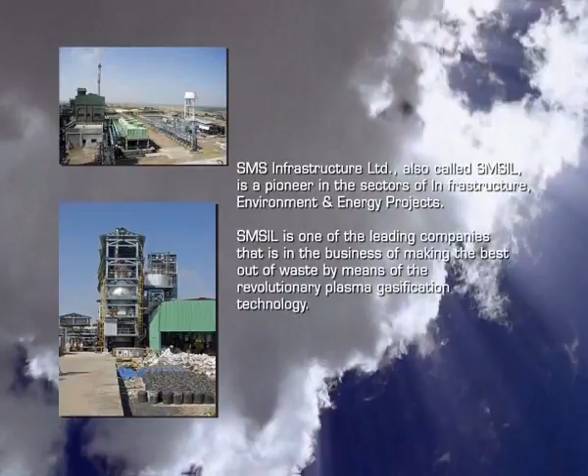SMS Infrastructure Limited, called SMSIL, is a pioneer in the sectors of infrastructure, environment and energy projects. SMSIL is one of the leading companies that is in the business of making the best out of waste by means of the revolutionary plasma gasification technology. It has its corporate office at Nagpur in India. Major advances in environmental projects have taken SMSIL to the international level.

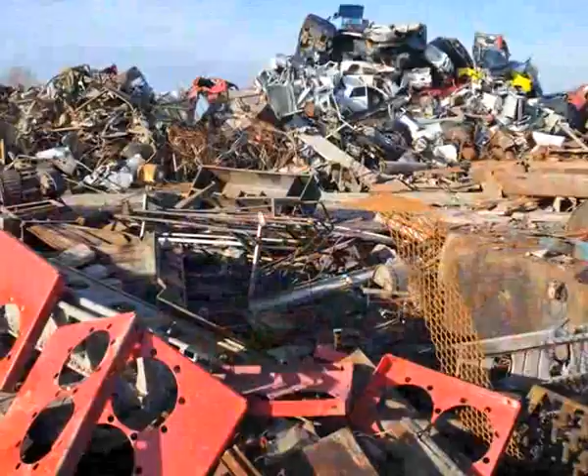SMS Envocare Limited is a group company of SMSIL and has successfully commissioned for the first time in the world the plasma gasification plant for the disposal of hazardous waste generated from more than 35 industrial sectors and several standalone units. The company specializes in creating solutions for scientific treatment and disposal of hazardous solid as well as liquid waste using environmentally sound methods.

What if we could harness the power of lightning to create energy? And what if in the process we could produce cleaner energy while reducing greenhouse gas emission and acid rain? What if we could produce power out of hazardous waste? A few years ago, these would have seemed mere questions, but today all this is possible thanks to plasma gasification. SMS Envocare Limited has demonstrated and transformed hazardous waste into energy using plasma gasification technology.

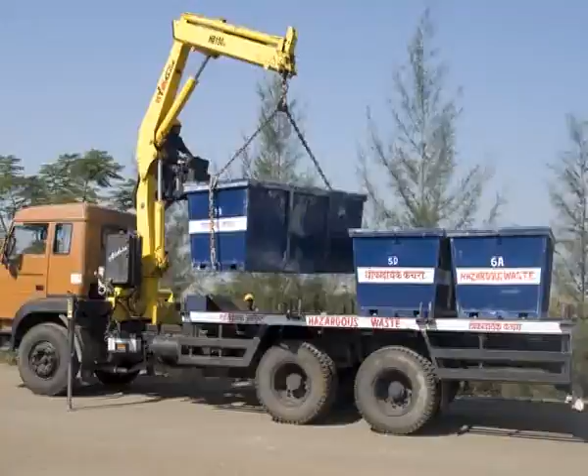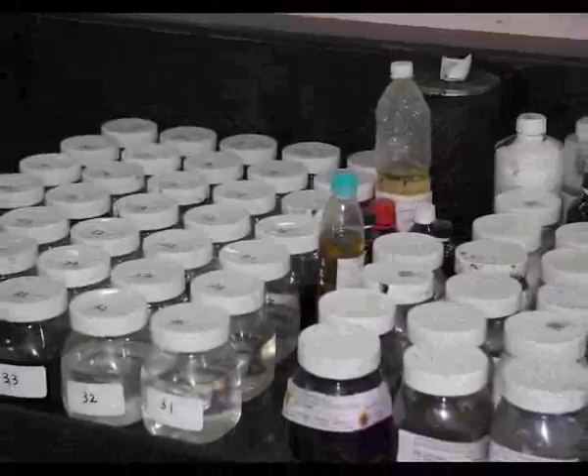The hazardous waste generated from the industries is taken to the disposal facility by a well-designed and dedicated transport system, authorized by statutory authorities and equipped with GPRS. The samples of hazardous waste are collected for characterization at the state-of-the-art laboratory of the facility. Based on the analysis report, the waste is disposed of suitably either by direct landfill with or without pre-treatment or through plasma gasification. The disposal path is decided by the prevailing guidelines of the environmental rules.

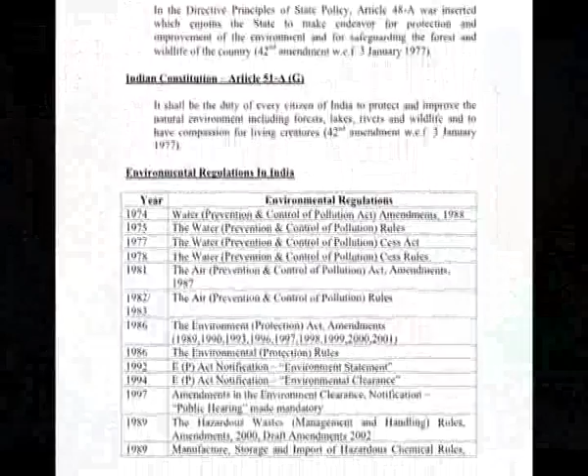Vision: to create national prominence and an international presence in environmental infrastructure projects and to enrich nature for a better tomorrow. Let's set an example. Give your business the plasma edge.

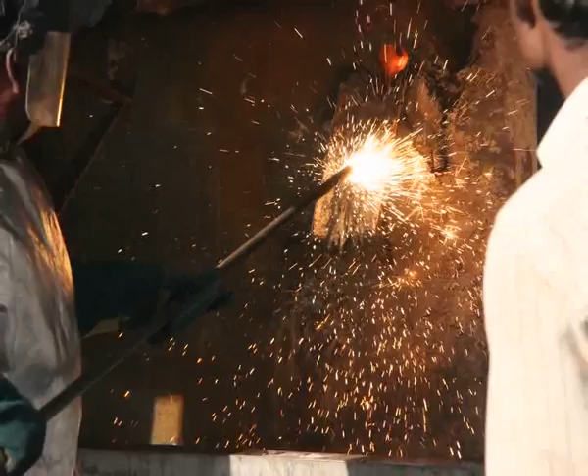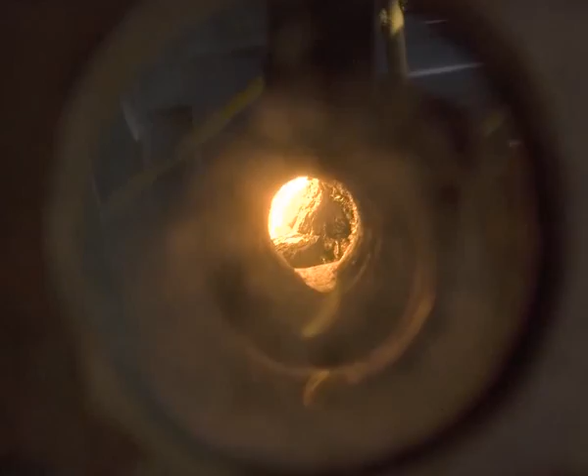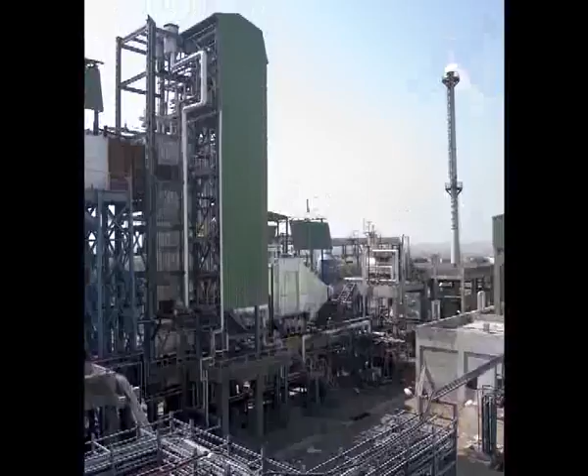What is plasma gasification? Plasma, often referred to as the fourth state of matter, is the term given to a gas that is ionized. An ionized gas is one where the atoms of the gas have lost one or more electrons and have become electrically charged. Plasma is formed by passing an electrical charge through a gas. Plasma torches are capable of producing temperatures nearly as hot as the sun's surface. This is the only technology proven to generate green power from waste treatment with least amount of emission of toxic air pollutants and the formation of slag, which is non-hazardous.

SMSIL has hands-on experience of 2 operating plants based on plasma gasification technology at Nagpur and Pune in India, each of 3 tons per hour capacity. The plasma island is sourced from Westinghouse Plasma Corporation USA, who are the pioneers for plasma technology, presently owned by Alter NRG Canada. The US EPA has endorsed gasification as a clean energy solution.

SMSIL has ventured into a strategic alliance with Alter NRG for getting technological support for the plasma island, and in turn SMSIL provides hands-on experience and operating data along with the equipment for the balance of the plant. Plasma gasification.

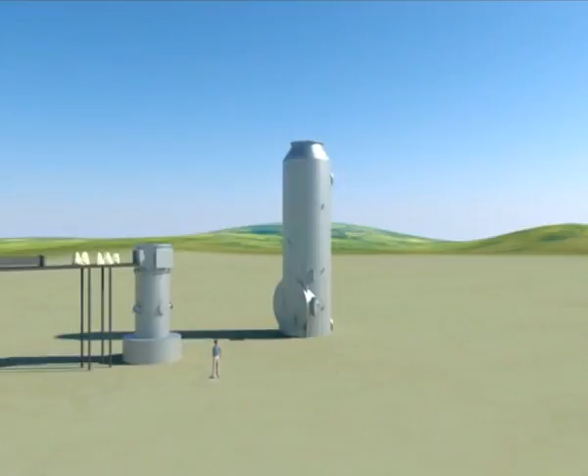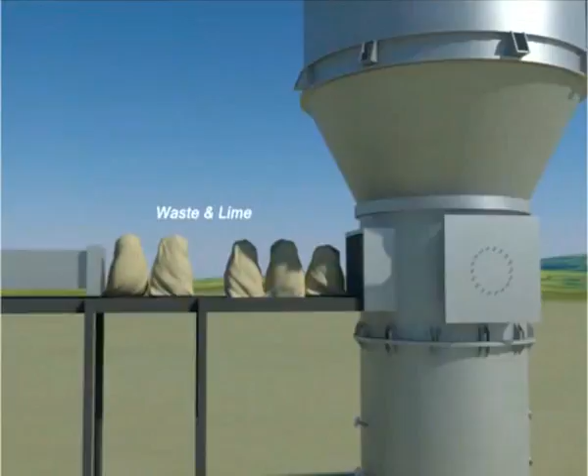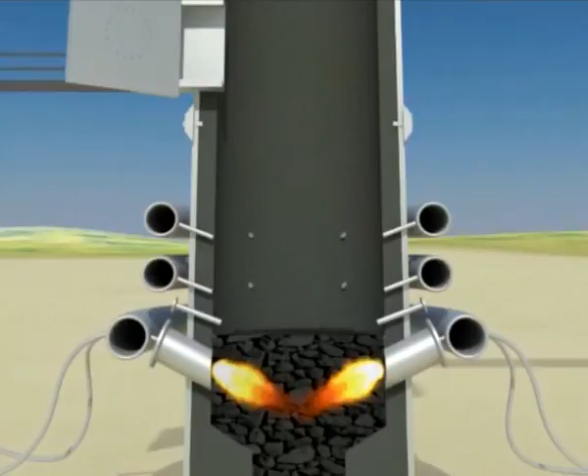SMSIL sites, being common facilities, get carbon-rich waste from waste-generating industries. All such waste, though containing high calorific value, vary in forms because these wastes are generated from various processes. SMSIL has installed a specially designed waste feed system which feeds the waste along with lime in required proportions to the plasma gasifier. The waste feed system can be maneuvered by varying the cycle time and handling capacity.

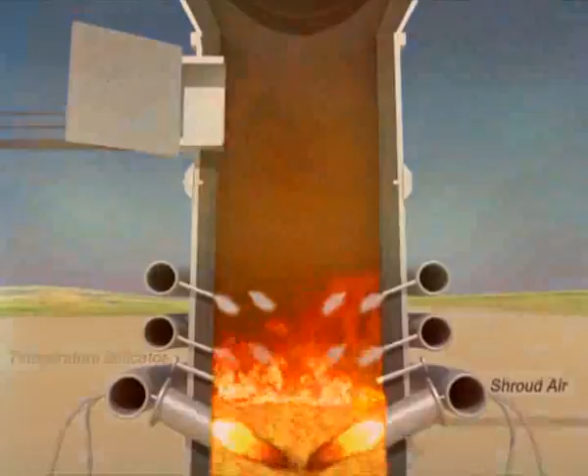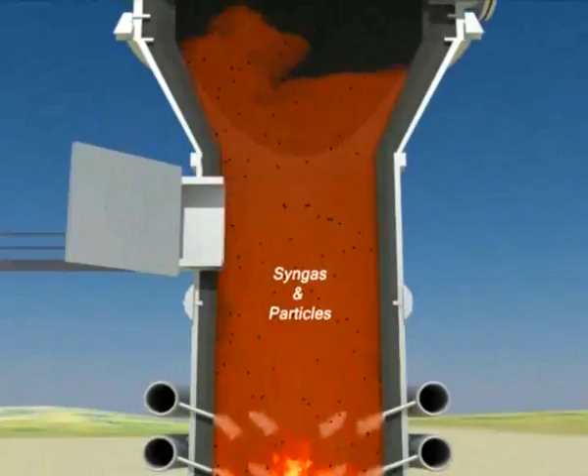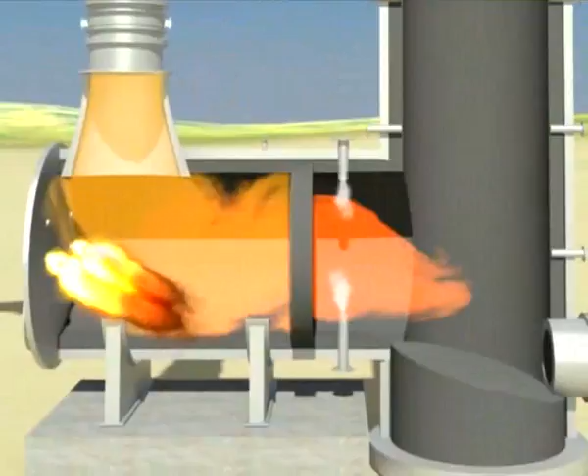The feedstocks are gasified in the plasma gasifier using intense heat, breaking them down to their basic elements, which in turn react to form energy-rich syngas. Plasma gasification is the next generation of gasification because it can turn any carbon-containing feedstock into syngas using higher temperature. The syngas generated is taken to the post-combustion chamber for complete combustion at 1100 to 1200 degrees Celsius.

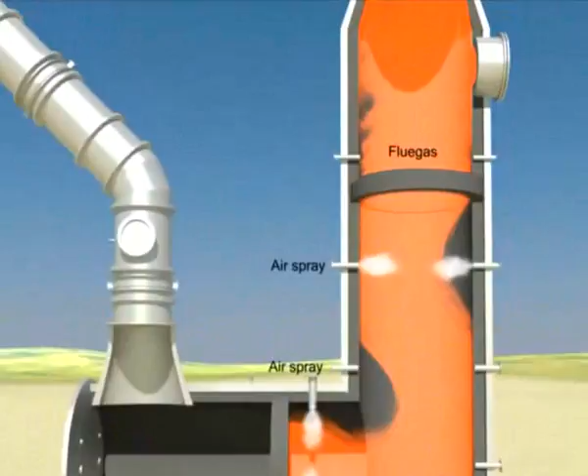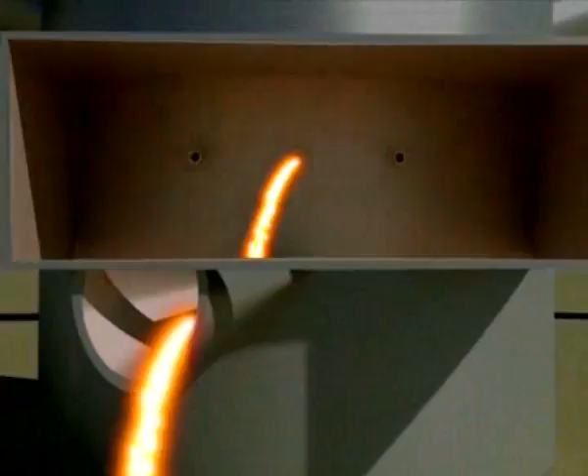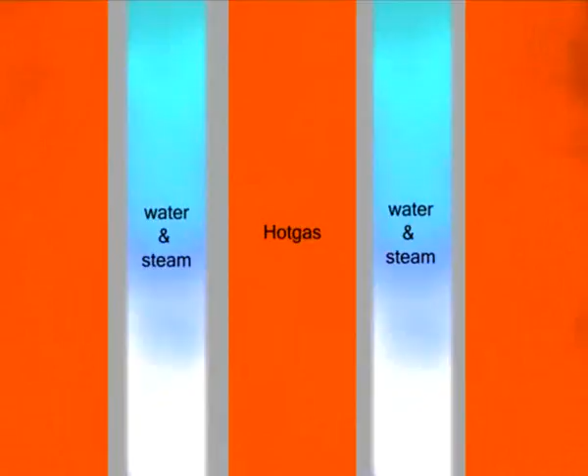All the waste invariably contains inorganic materials which get converted into complex silicate compounds in the gasifier and are removed as molten vitrified slag, which is then quenched by a continuous water flow. The flue gas from the post-combustion chamber, when sent to the waste heat recovery boiler, facilitates waste heat recovery, generating high-pressure steam which operates a power plant that has a steam-based turbine.

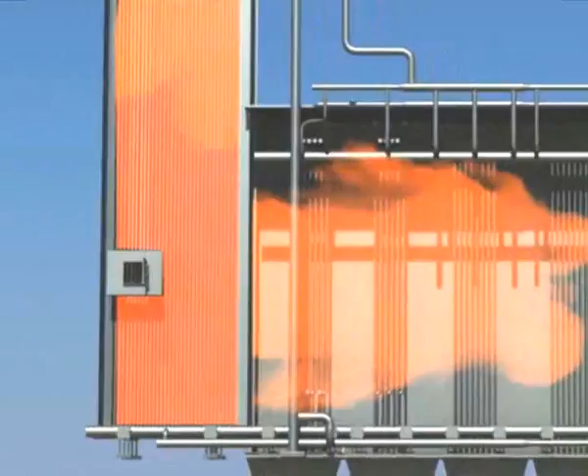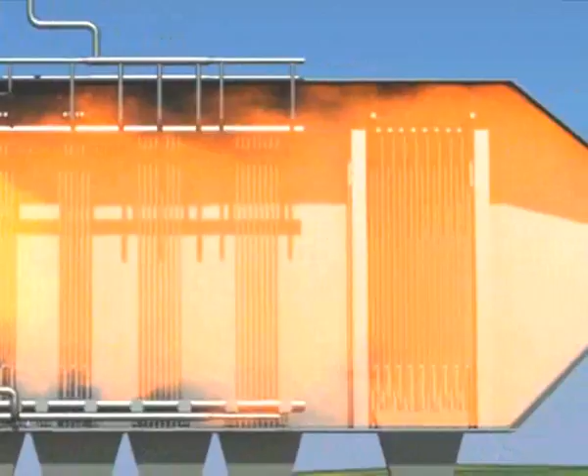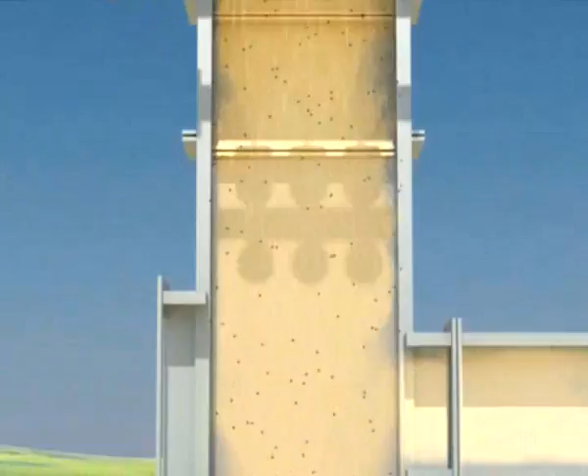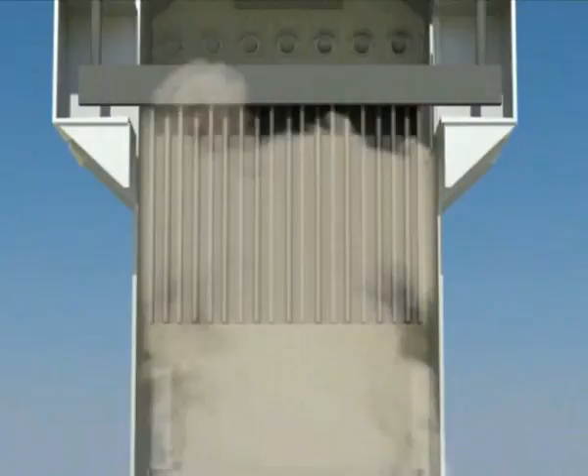The flue gas after heat recovery in the waste heat recovery boiler is further treated in the air pollution control system, which has elaborate arrangements for cooling and multi-stage scrubbing to remove acidic gases. The air pollution control system also consists of wet ESP, where very fine particulate matter is trapped and removed on a continuous basis using a water spraying system.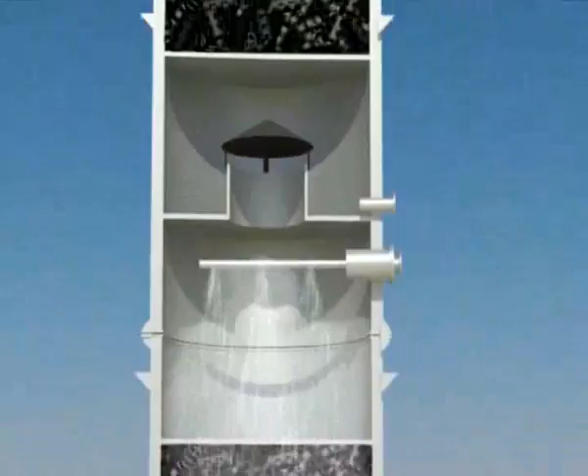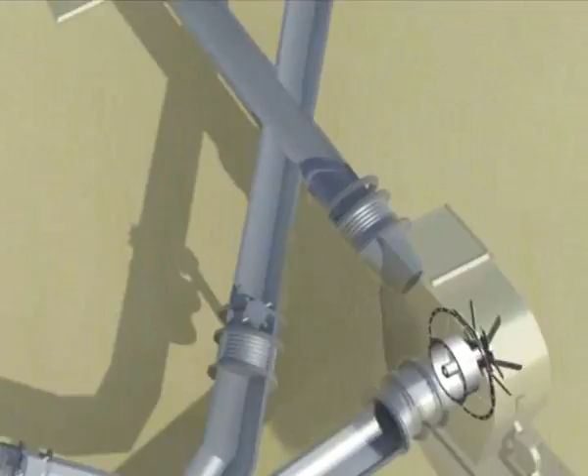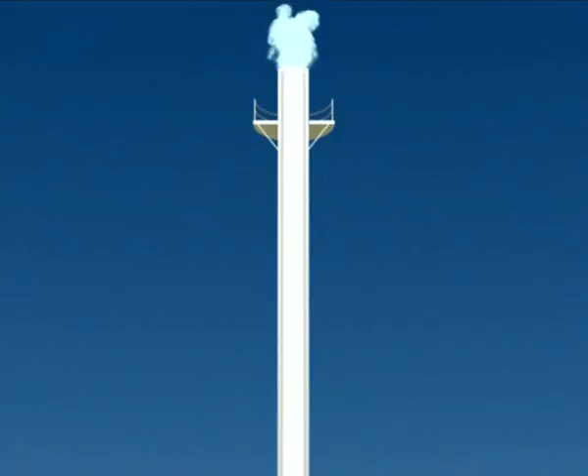The clean and cold flue gas is driven out by ID fans through a 45-meter height stack. The ID fans are capable of maintaining negative pressure throughout the system up to the plasma gasifier. Thus, plasma gasification creates clean energy, helping to improve the environment by giving out very low emissions containing negligible concentration of dioxin and furan.

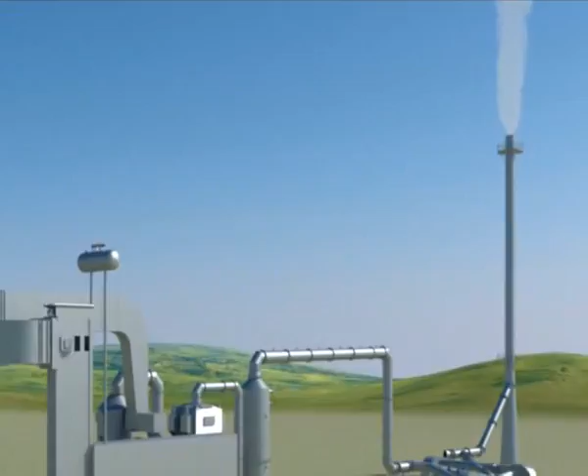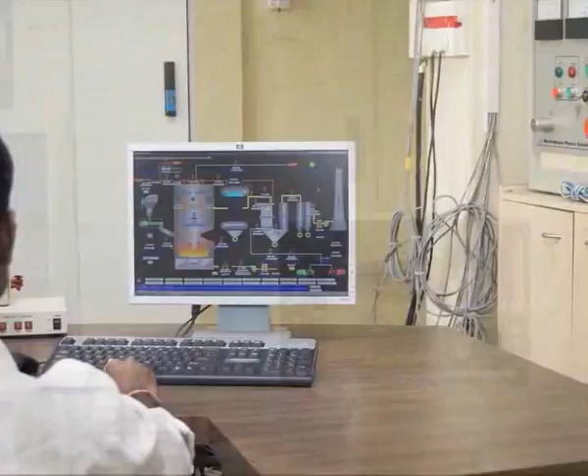The complete process of gasification is monitored and the data is recorded by a well-designed, sophisticated SCADA system, which has all the safe interlocking systems for operating the plasma gasifier. The design of the plasma island and the balance of the plant incorporates safety requirements like safety valves, nitrogen blanketing, firefighting systems, and multi-level emergency power systems consisting of UPS and DG sets.

Plasma technology takes care of all the shortcomings and negative aspects of conventional incineration. Since no residues are generated in appreciable quantities, use of landfill is eliminated. This is a better solution of converting energy-rich waste into clean energy through plasma gasification. SMS's plasma gasification facility has certifications for ISO 9001 and ISO 14001. CDM benefits are applicable and ISO 14064, which prescribes greenhouse gas accounting, is under implementation.

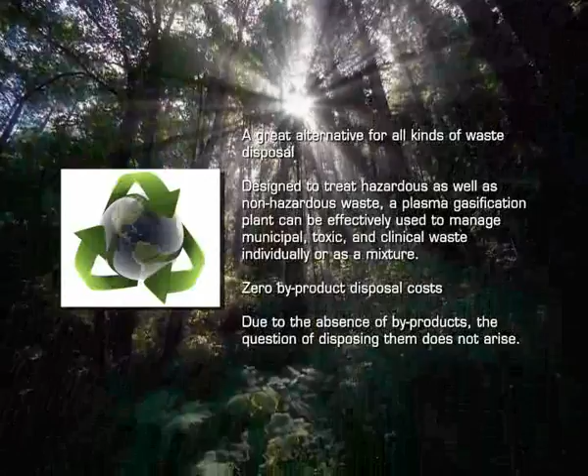Why plasma gasification? Reduction in the carbon footprint. No doubt, plasma converted gas will produce some emissions. These pollutants, however, are quite negligible, since the gas is effectively cleaned before venting to the open atmosphere. A great alternative for all kinds of waste disposal. Designed to treat hazardous as well as non-hazardous waste, a plasma gasification plant can be effectively used to manage municipal, toxic and clinical waste individually or as a mixture.

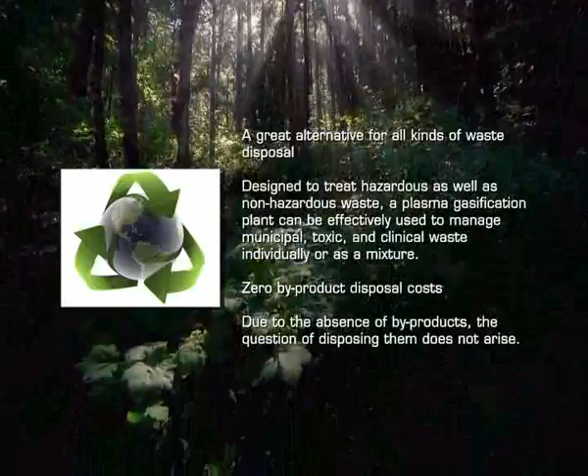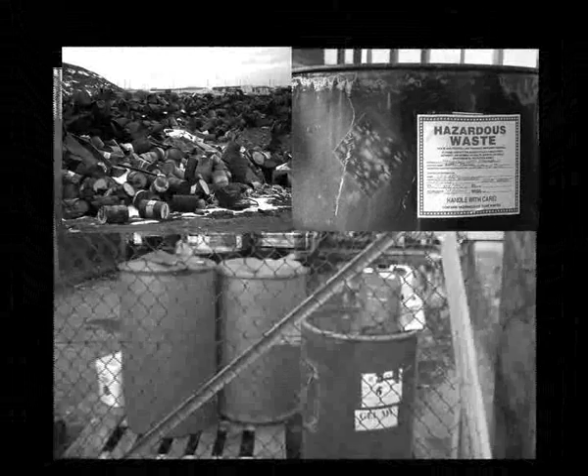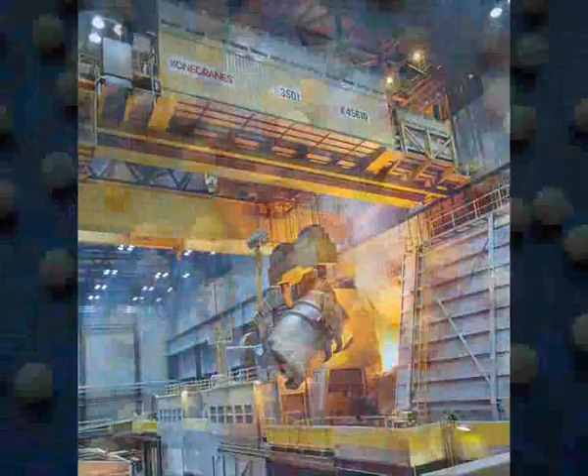Zero byproduct disposal costs. Due to the absence of byproducts, the question of disposing them does not arise. Energizing the world for a greener tomorrow through plasma gasification. Practically all companies that need to eliminate hazardous waste without posing any threat to the environment are recommended for plasma gasification. Companies pertaining to automobile, petrochemicals, steel and pharmaceutical sectors, just to name a few, can leverage the benefits of plasma gasification. Most of these companies generate hazardous waste in large quantities.

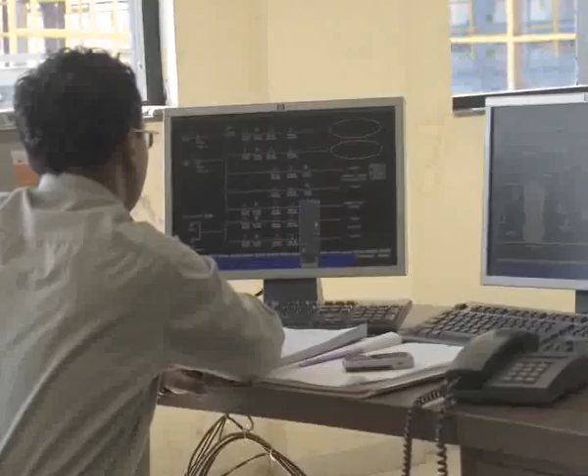Plasma gasification assures total disposal of waste by producing green energy to meet on-site and off-site power needs. Municipal solid waste is also handled in the same fashion by converting waste into valuable clean energy. So, let's think differently. Just about everything under the sun can be gasified. Plasma gasification gives us a different perspective to look at waste. It provides a viable, stable, reliable and cost-effective energy solution to the world.

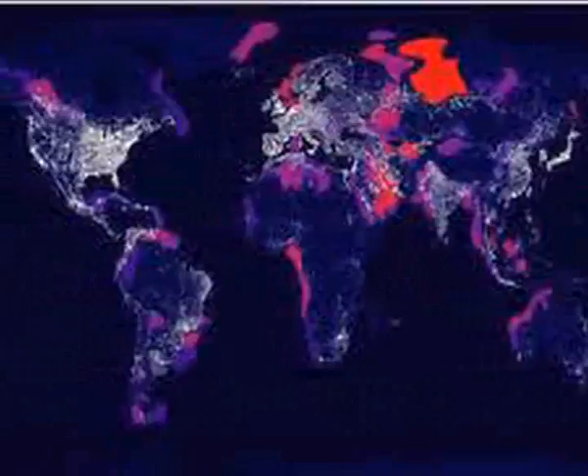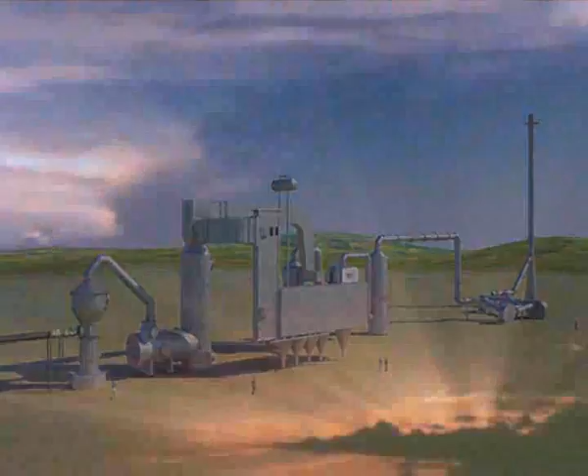Waste is inevitable, but it can be transformed into a substantial amount of usable energy. The amount of energy generated would, however, largely depend on the characteristics of the waste. The global scenario in terms of energy availability and waste management does not seem very promising. The problems are many, but solutions are also available only if we sincerely intend to implement them. Plasma gasification technology is the answer. It's the future, and the future has arrived. The most practical way of saving our planet and securing our lives.